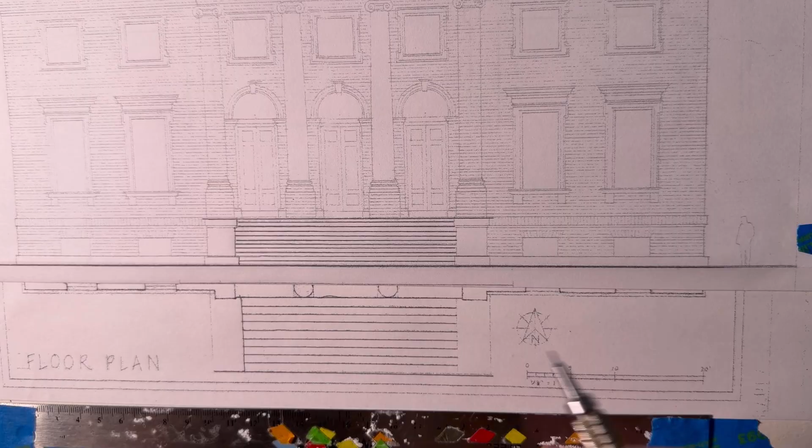Hi, welcome to the setup for the James Gibbs residence elevation plan view. This is a shades and shadows rendering, and this is the basic setup that I have here in my house.

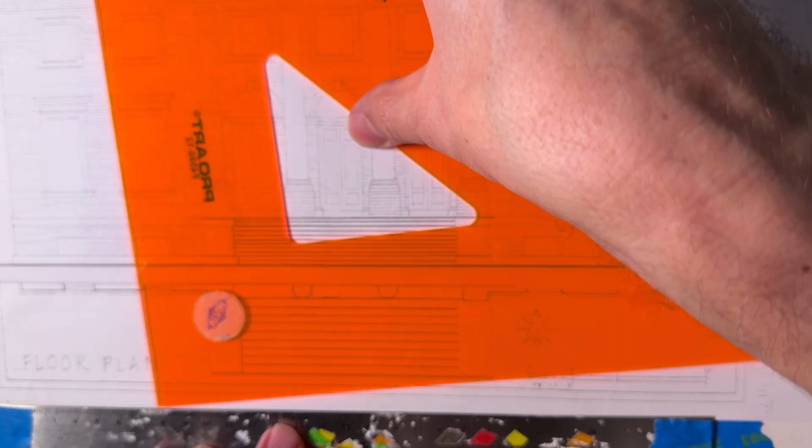I've used an inking ruler, which has a little pad on the back to raise it up, as my parallel bar. And I use that raised ruler because it catches my triangle much better than something like an architectural scale, which is kind of the worst thing that you can use because it has that slope side that doesn't form a perpendicular angle. So when you bring a triangle or something up, you can hopefully see it on the video,

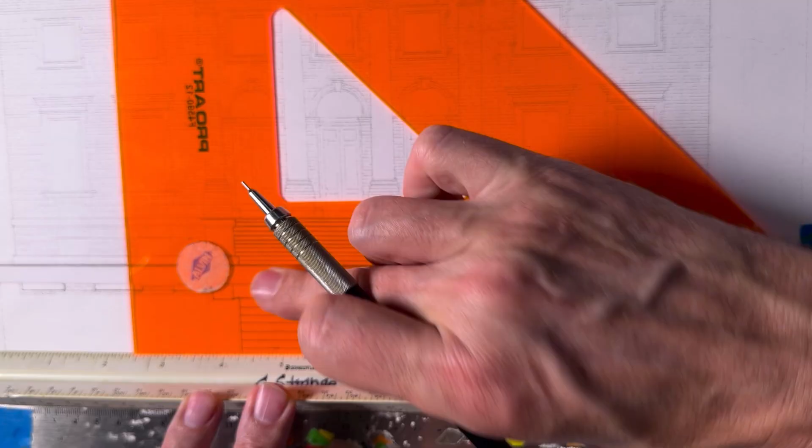it actually rides up. And you can try to really press down. It can work in a pinch if you really have to. Even a regular ruler can be okay sometimes, but the raised ruler is nice. Just gives it a little bit more grab onto that triangle.

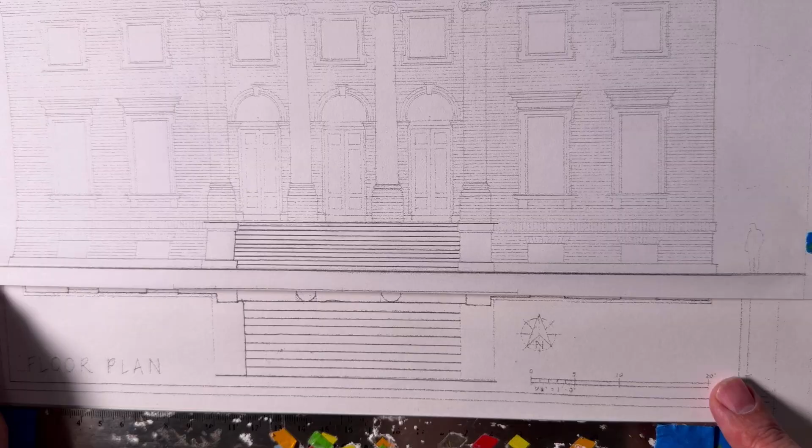I've used 2 printouts and I made sure they were basically the same scale. When I was first putting down the plan, I made sure that it was perpendicular to my parallel bar when I taped it down. And then after that was perpendicular, then I set my elevation on top. Of course, making sure everything was perpendicular all along the way.

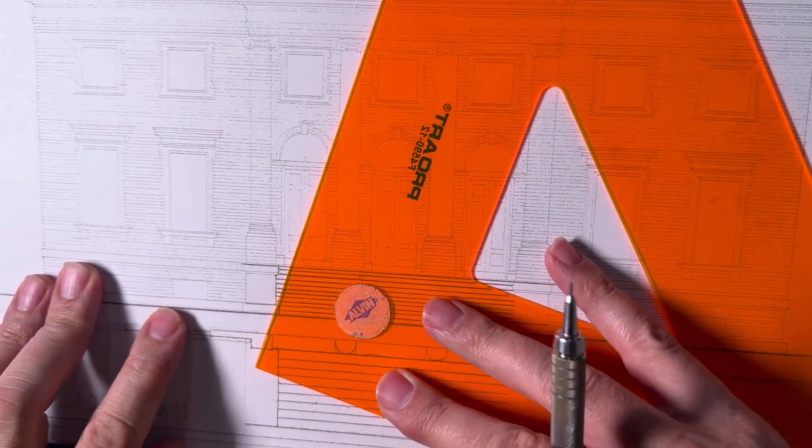When I was focusing on the alignments, I'm sorry, I'm using a really ghetto setup. I wish I could show you too. That's why the camera keeps slipping.

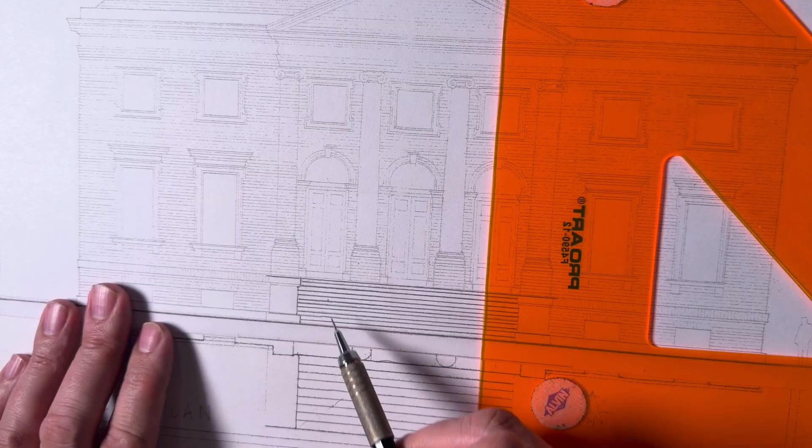The most important thing, and really the goal of this exercise, is to cast this corner out here onto the stairs and to find the moment that we see the rise here turning, the moment it turns and going back along this edge here. So I wanted to make sure to align this point and this point. That was my main goal in setting up and making sure everything was perpendicular.

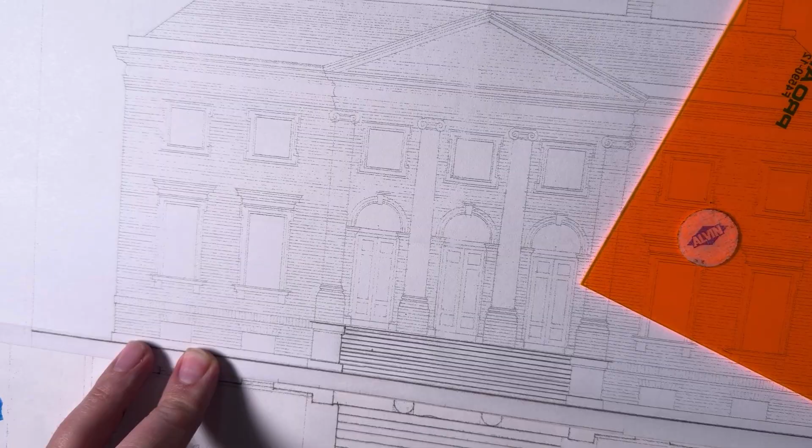You can also see the stairs are a stronger line weight than the rest because this was so light, I actually couldn't see it through my tracing paper very well. So I used my straight edge and darkened each of those stairs.

This is about the 10th time I've done this video, so I'm sorry, I'm not editing it at this point. I'm really done.

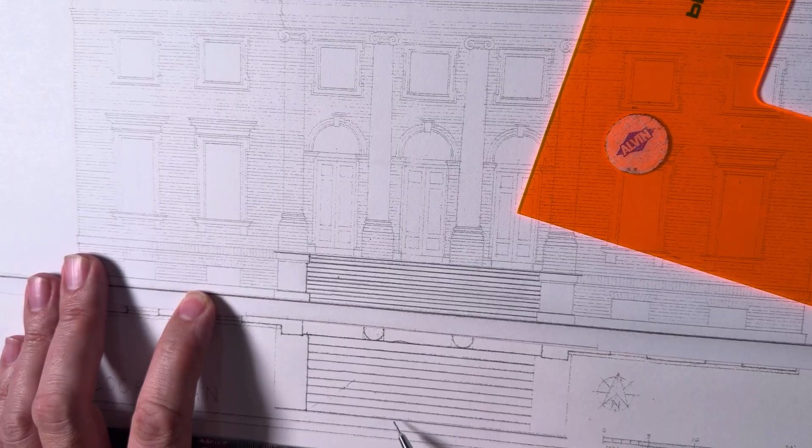I've also darkened the abutment here and that front face. And yeah, just taping everything down, making sure it's really solid on all 4 corners. I don't want any kind of shifting around. Of course, you're probably going to be working on your drafting table and parallel bar, but I wanted to show you this kind of